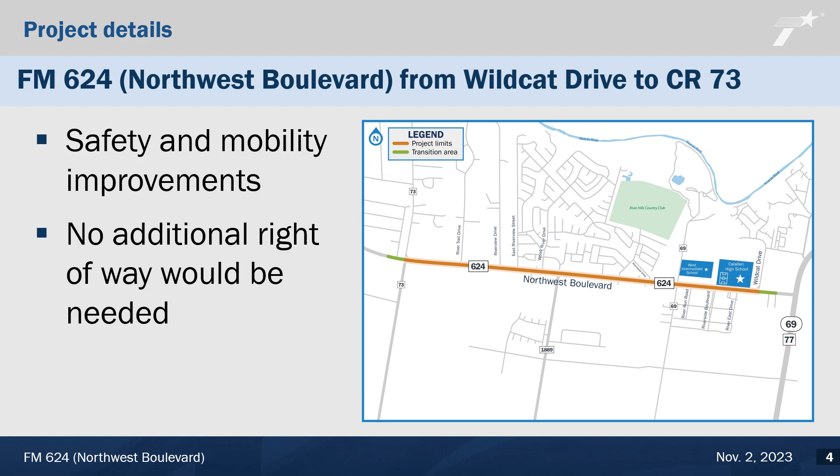The goals of this project are to improve safety for pedestrians, bicyclists, and vehicular traffic, reduce the conflict points where crashes are most likely to happen, and to improve how people travel through the project area.

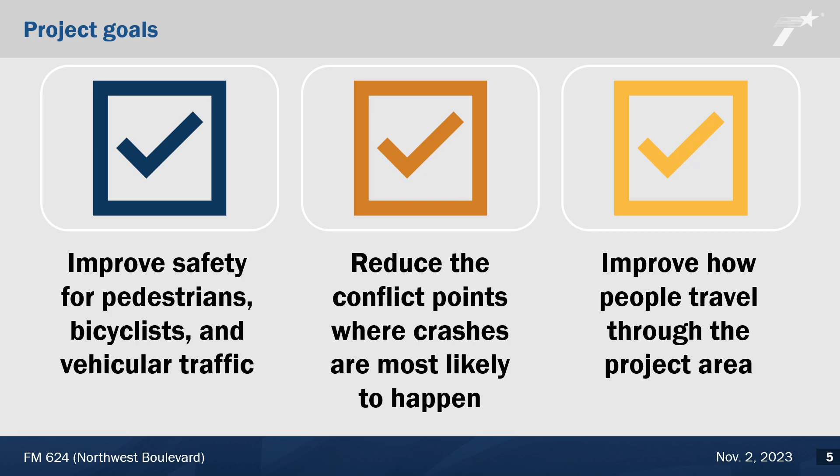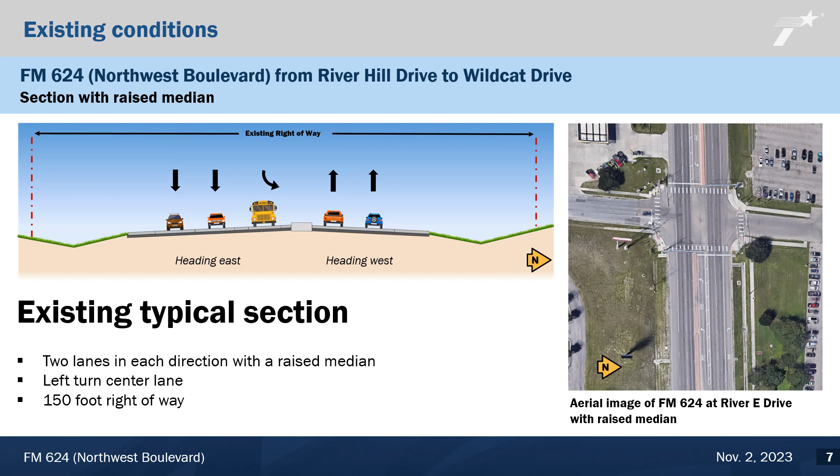To better understand the proposed improvements, we will look at the two different existing conditions along this stretch of FM 624. Between County Road 73 and River Hill Drive, FM 624 has 2 lanes in each direction with a center turning lane. The image on the right shows the center turn lane at the intersection of FM 624 and County Road 73. The second existing condition is the section with a raised median. Between River Hill Drive and east of Wildcat Drive, FM 624 has 2 lanes in each direction with a raised center median that allows left turn and U-turn opportunities at center median openings.

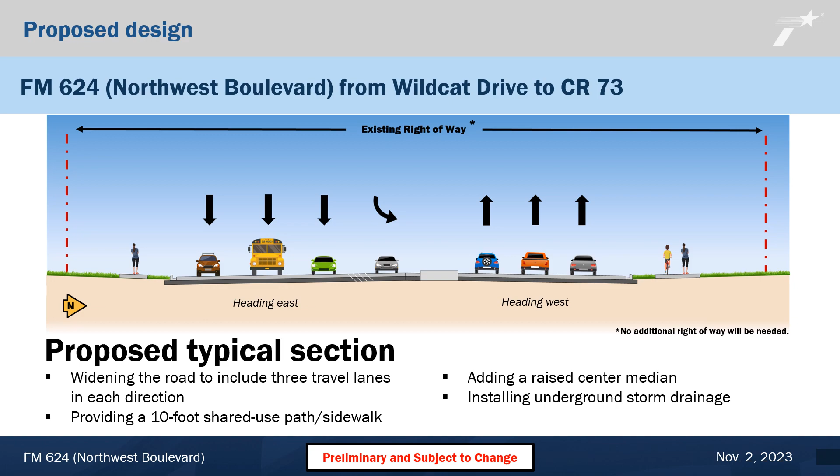So what is TxDOT proposing? TxDOT's proposed design includes widening the road to include 3 travel lanes in each direction, providing a 10-foot shared use path on the north side of the road and a sidewalk on the south side of the road, modifying the existing center median at Wildcat Drive and extending it west to County Road 73, and installing storm sewer in some areas of the project. This is a visual of the proposed design. Now let's take a closer look at the design details.

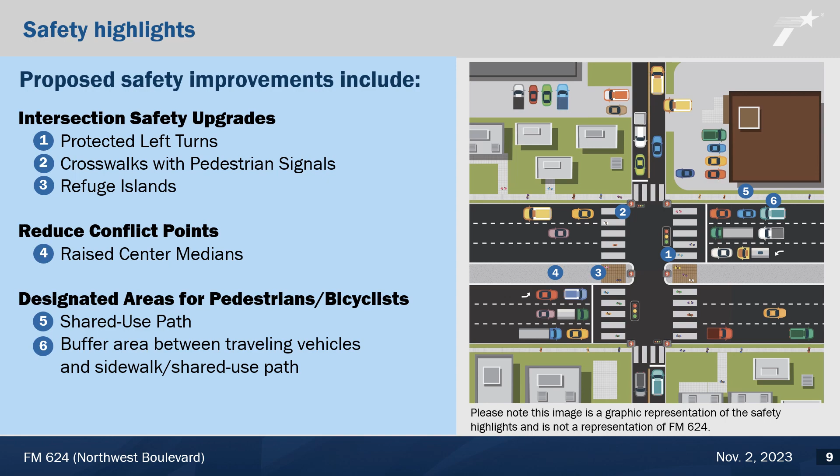TxDOT's #1 goal is safety, and the proposed design for this project includes a number of safety features. We would like to highlight a few of them. As cross streets intersect with FM 624, TxDOT is proposing a number of safety upgrades for those intersections that benefit drivers, pedestrians, and bicyclists. To reduce conflict points, TxDOT is proposing a raised center median along the project corridor. And TxDOT proposes designated areas for pedestrians and bicycles to be separated from traveling vehicles in the corridor. Now let's review these safety highlights one by one.

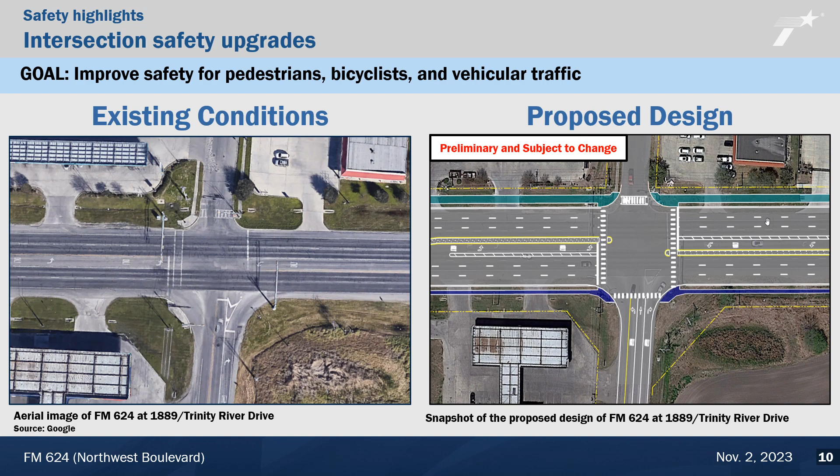We'd like to point out the green shaded area. This is the proposed 10-foot shared use path north of the corridor, and the blue shaded area would be a sidewalk south of the corridor. You can take a closer look at the draft schematic design online at txdot.gov.

The first safety feature we will highlight is the change to left turns at signalized intersections. With the goal of improving safety for pedestrians, bicyclists, and vehicular traffic, TxDOT proposes that the left turn lights on FM 624 will be changed from permissive to protected. Currently, the left turn lights on FM 624 are permissive, which means that left-turning vehicles must look for a gap during a yellow flashing arrow and yield to oncoming traffic.

TxDOT proposes that the left turn lights on FM 624 will have a protected green turn arrow or a steady red arrow. During the green arrow, a left turn is protected from oncoming traffic.

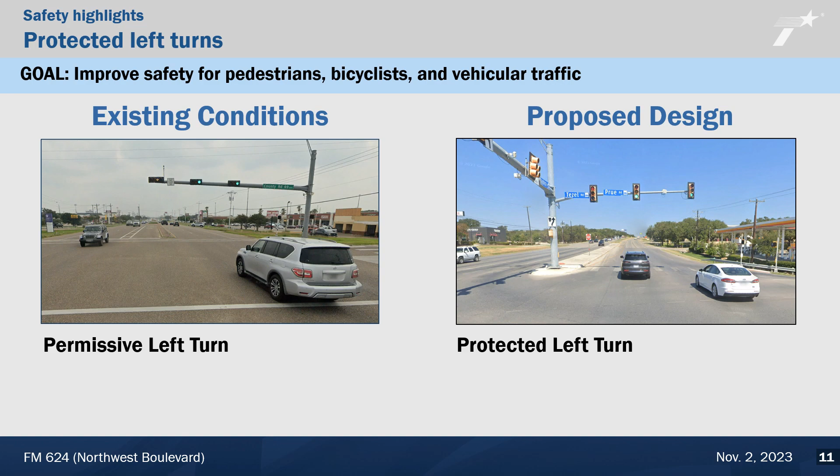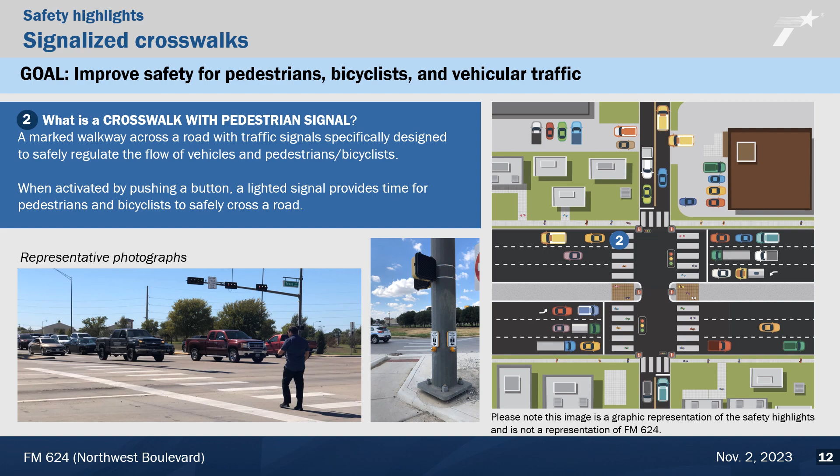Another feature we commonly see at intersections is a crosswalk. Signalized crosswalks are a marked walkway across a road with traffic signals specifically designed to assist with the flow of vehicles and pedestrians or bicyclists as they share the roadway space. When a pedestrian or bicyclist activates the signal, a lighted signal provides time for pedestrians and bicyclists to safely cross a road. A representative photo is on the left with a graphic representation of these improvements to the right.

Another safety feature for fragile roadway users is a refuge island. You will see this as a safe space of pavement in the middle of the road where pedestrians and bicyclists can stop before they finish crossing a road. All of these intersection upgrades, protected left turn signals, signalized crosswalks, and refuge islands work towards the goal of improving safety for pedestrians, bicyclists, and vehicles sharing the road.

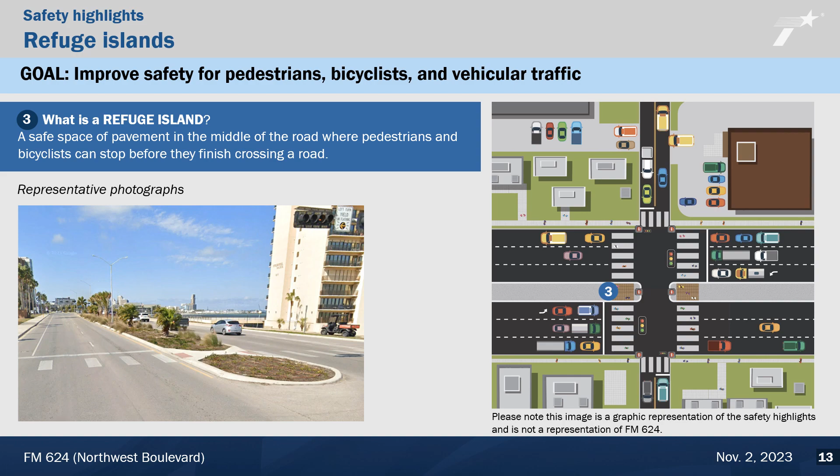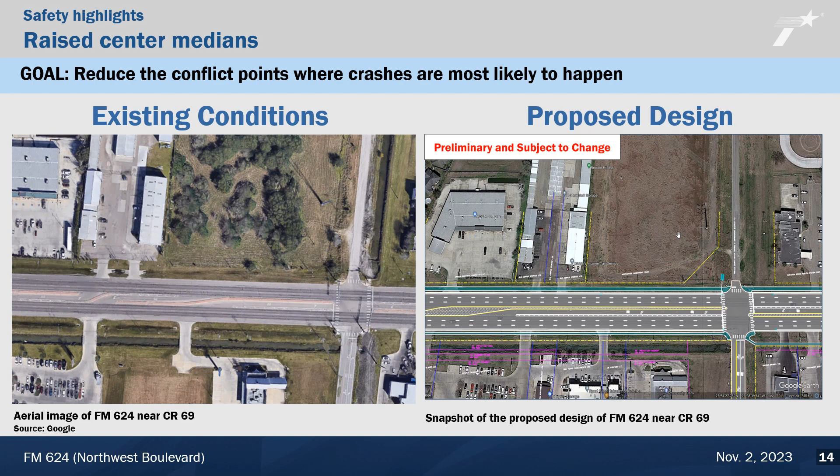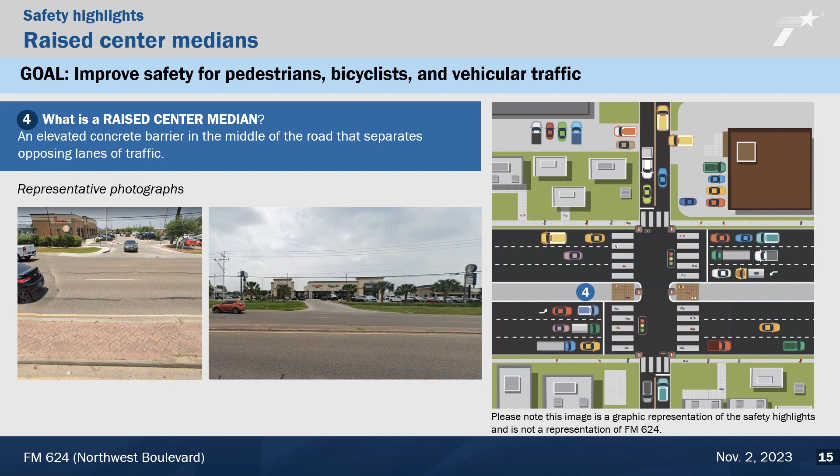With raised center medians, vehicles at a signalized intersection wait for a protected green turn arrow. A raised center median also helps vehicles at the center median brake to gain better sight distance of oncoming traffic and make a turn when there is a clear path. Here are a few images of different raised medians on FM 624 near popular destinations. We also see these curbs as we drive around town. While a raised median may add some travel time to your journey, your safety is prioritized.

Finally, let's note the designated areas for pedestrians and bicycles to be separated from the traveling vehicles in the corridor. On the north side of the corridor, TxDOT proposes a 10-foot shared use path. This is a concrete path that is wider than a sidewalk and is designed to accommodate the movement of both pedestrians and bicyclists. On the south side of the corridor, TxDOT proposes a sidewalk for pedestrians. TxDOT will provide a buffer area to serve as a safety barrier between the road and these two pathways.

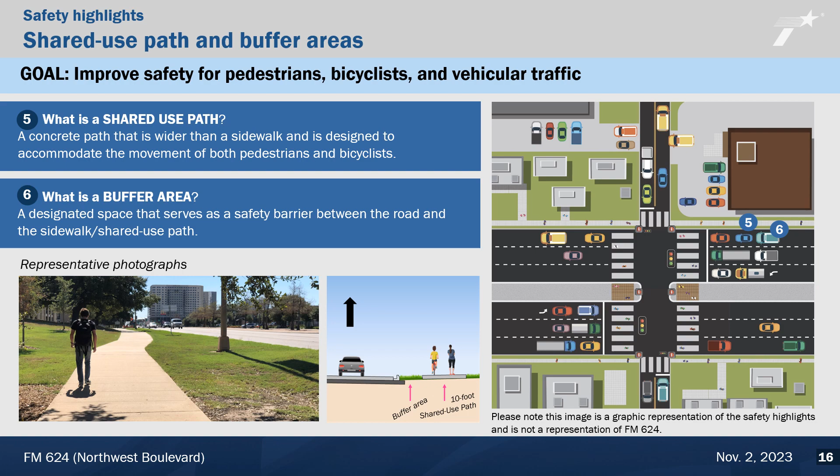Let's now touch on the overall process for projects. The project development process consists of multiple phases, each including public involvement. In 2021, the City of Corpus Christi published the Northwest Boulevard FM 624 Corridor Plan Report, which included multiple proposed solutions to improve FM 624. TxDOT values the work done by the city and the input received by the community during that early planning process. TxDOT's mission is to connect you with Texas, and this project proposes advancing safety and mobility improvements for drivers, pedestrians, and bicyclists, such as the previously mentioned paths along the corridor for pedestrians and bicyclists.

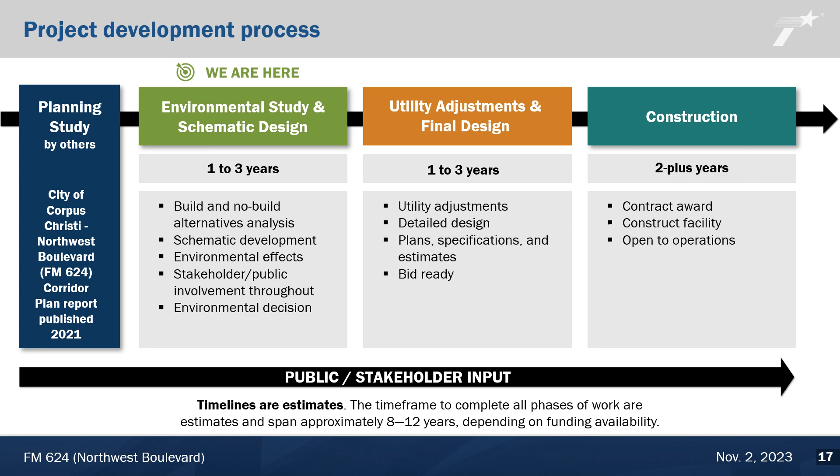TxDOT's project is currently in the environmental and schematic design phase. There will be an additional public involvement opportunity early next year, and we anticipate the environmental and schematic design phase to be complete in the fall of 2024. If the decision is made to move forward with the project at the end of the environmental study, the next phase involves utility adjustments and final design. All improvements are proposed to be constructed within the existing right-of-way. Advancement from phase to phase is contingent upon the outcome of the previous phase and funding availability.

If you have any questions at any point during the project development process, please contact Kimberly Amy by email or phone during regular office hours at 361-808-2383. Thank you for participating in this virtual public meeting. This concludes our presentation.